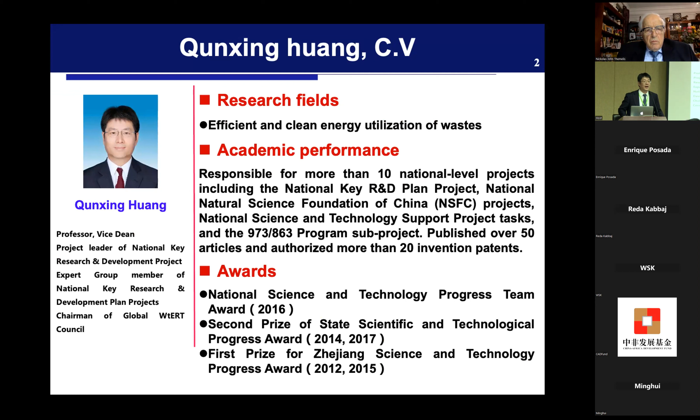And I would like to give you a very brief introduction about waste to energy research works in our university. And tomorrow, we will bring you to the big facilities we have built for waste to energy research. And here is my personal, very brief CV. I graduated from Zhejiang University, and I have been working on waste to energy for more than 20 years, and have been a PI of a lot of big national projects. And now I'm a senior expert of the national R&D research work on waste to energy.

So here is some brief information about what we are doing here in our university. The targets we are dealing with include municipal solid waste, industrial waste, and hazardous waste. We have been working on these kinds of waste for more than 30 years.

And most of our work was focused on the energy and also the environmental aspect. We are dealing with the waste from the aspect of the energy, and also we are taking care of the pollutions from the aspect of environmental protection. So we combine this together. And a lot of the research work was focused on improving the combustion efficiency, and to develop new technologies and philosophies for the treatment, like gasification, like pyrolysis.

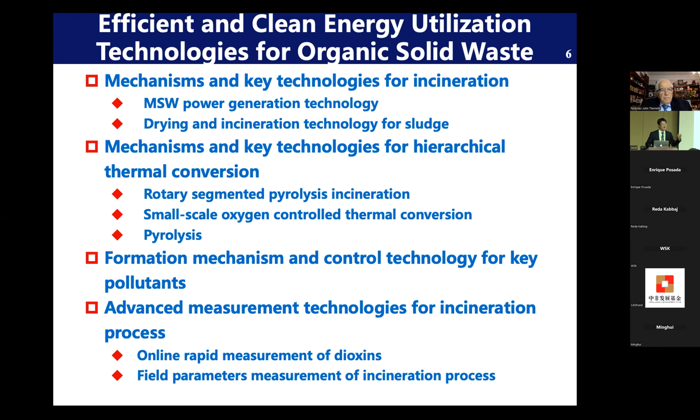And this is a technology we developed more than 25 years ago, fluidized bed incineration technology. And now it is widely applied in China, not only for municipal solid waste, but also for sludge and industrial waste, especially sludge and industrial waste. And it was awarded a national award in 2006.

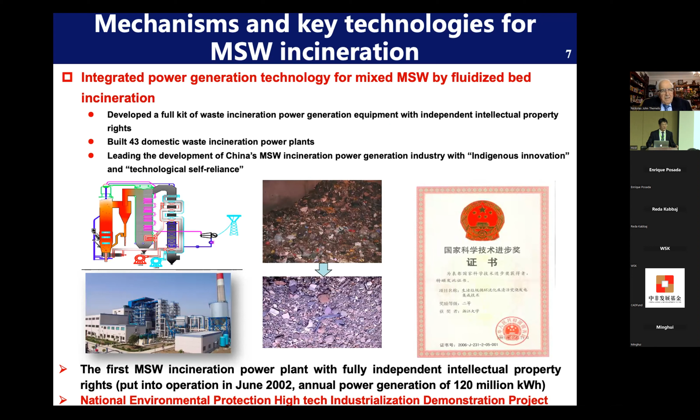And also we are dealing with new technology for sludge drying, and also to improve the efficiency of sludge incineration. And tomorrow you will see our facilities in our research center, Zhejiang.

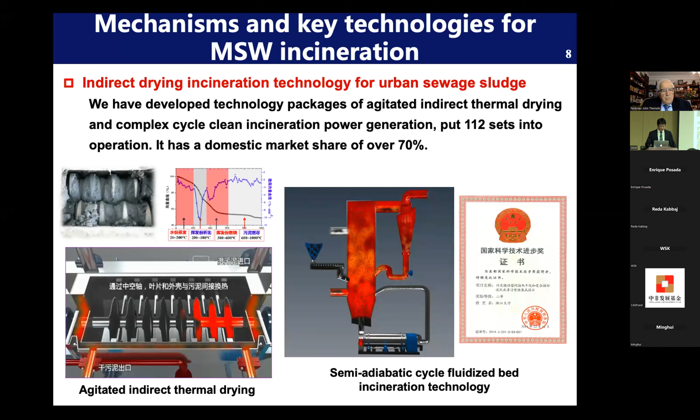And also we are working with hazardous waste, like medical waste. We have contributed a lot during the COVID-19 situation by developing new incineration technology to deal with medical waste, pharmacy waste, and the like. And this technology is also good.

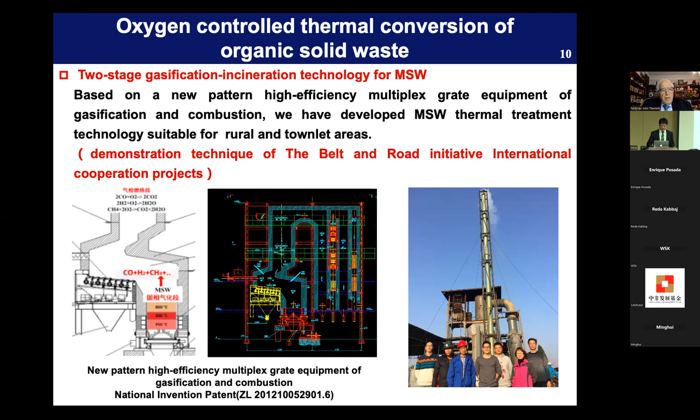And also, you know, in China, we have a lot of rural areas, people living in villages. So we developed small-scale incineration systems to take care of this waste. This is located in Jiangxi province, which was supported by a national NGO fund. And also there is a demonstration in Indonesia for waste incineration in a small place near Jakarta.

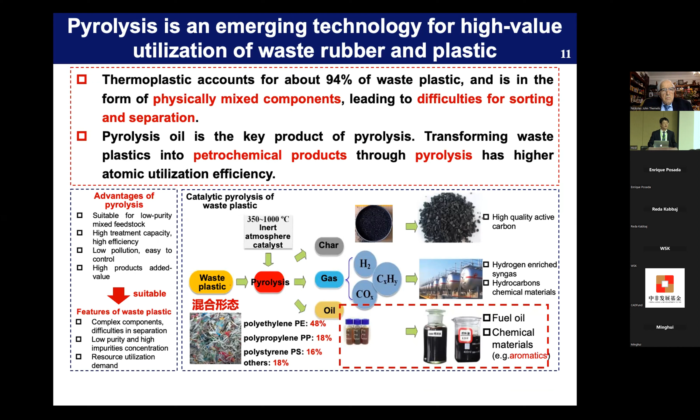And another thing we are recently doing is about industrial waste, like waste tires and waste plastics. And now we are using pyrolysis technology to take care of all this waste. We are converting them into oil, high quality oil, BTX-enriched oil, and also carbon for recirculation. And this is the pilot system.

And if some of your professors will stay here, I would like to bring you to our demonstration plant. It's very big. We are working with the largest rubber maker in China to reuse the carbon black and also to improve the recycled product quality.

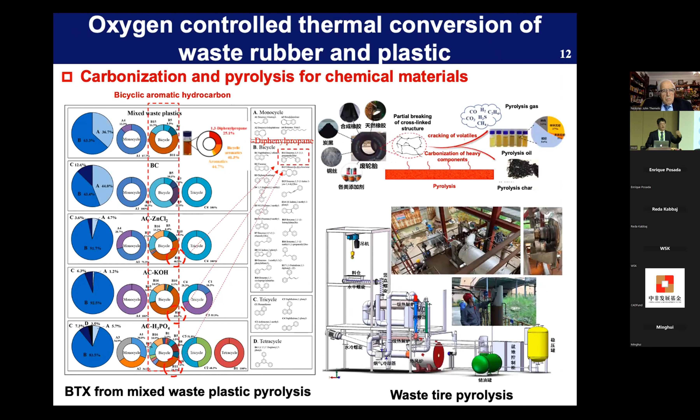And also another thing, we are working with the United States EPA on dioxin online monitoring technology, and it has now been applied in a very big plant in Hangzhou and in Ningbo. It uses laser technology to monitor dioxins continuously online. It's a very difficult technology, but the machine is already working.

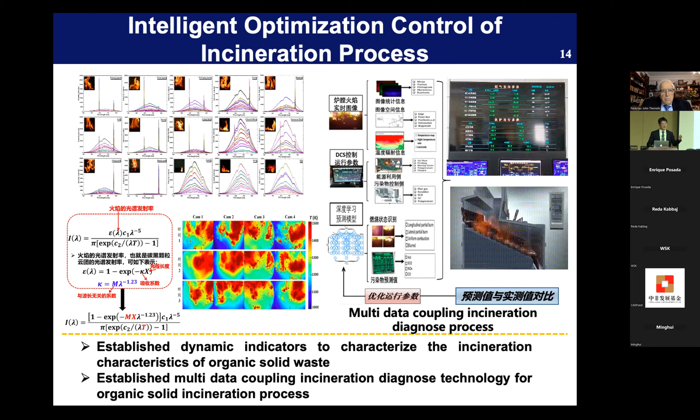And recently, under the support of our national research program, we are working on applying AI technology to improve the combustion efficiency. This is research work we have carried out in the last 2 or 5 years. We are working with Alibaba. They have an industrial cloud department. So we are using imaging technology and also neural networks to improve the combustion efficiency of various waste, like industrial waste and also municipal solid waste.

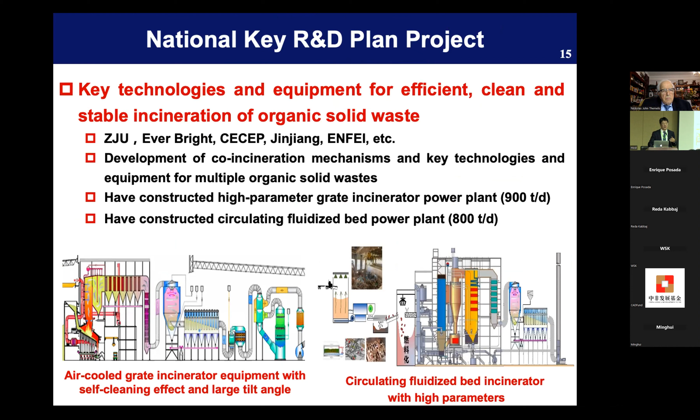And this is a key technology and equipment project which was supported by our central government, and I'm the PI of this project. The overall fund was over 20 million RMB. So we are working with Everbright and Jinjiang Group and built the largest 900 tons per day facility, and it is now in operation. And this project was highly valued by our central government.

And then this is a new technology we are developing with Jinjiang Group to further process municipal solid waste and convert it into valuable fuels like RDF. And then the RDF can be supplied to cement plants or other industries. And the quality of these fuels was very good for electricity generation and also for heating, and also very suitable for burning in a circulating fluidized bed.

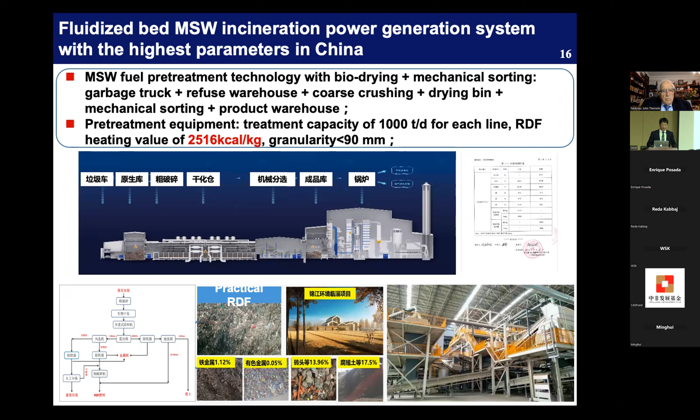Here, this is the largest CFB incinerator in China for municipal solid waste. You can take a look at the steam parameters. It's very high. This is the highest steam parameter. It's very great work for the future. This is for the future of waste to energy.

And the overall electricity generation efficiency currently can reach approximately 30%. It's very high for waste incineration systems. And the steam pressure is very high. It's close to 8 megapascals. And also, this is a demonstration project. And if you have a chance, maybe you can go visit it.

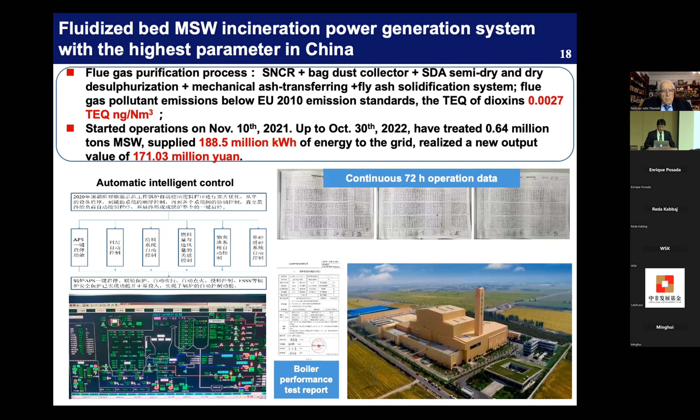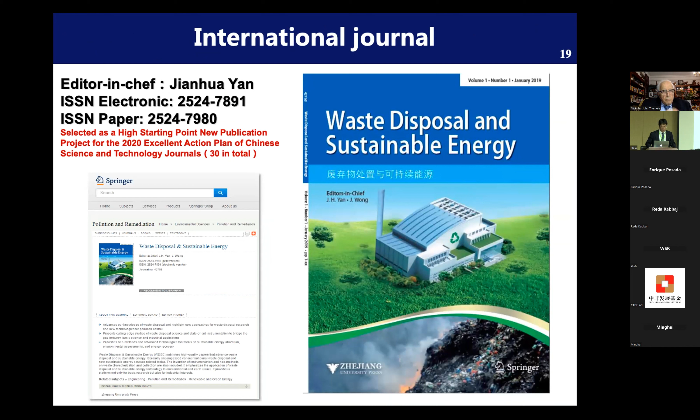Thank you. And this is a very brief introduction because we will have a chance to meet tomorrow and to see our facilities. And during that time, I would give you a more detailed introduction about our systems and about our research works. And I hope you will enjoy the Congress.

I think the most important thing for us to gather here is for the future of waste to energy. And I think it's not only to improve the efficiency, but also we have to be low carbon. Now a lot of the work is on how we can reduce the carbon and how we can increase the incineration residues value. So that's the future of waste.

Also, from this conference, I noticed a lot of professors come from developing countries, and I hope the experience of China and also from Germany or from Korea can be helpful for the waste to energy industrial business in your countries. Thank you very much, and I hope you can enjoy this Congress.

Thank you so much, Professor Yan. It's a very impressive presentation. We are very honored, and among all our members, we congratulate you on becoming the president of WtERT again.

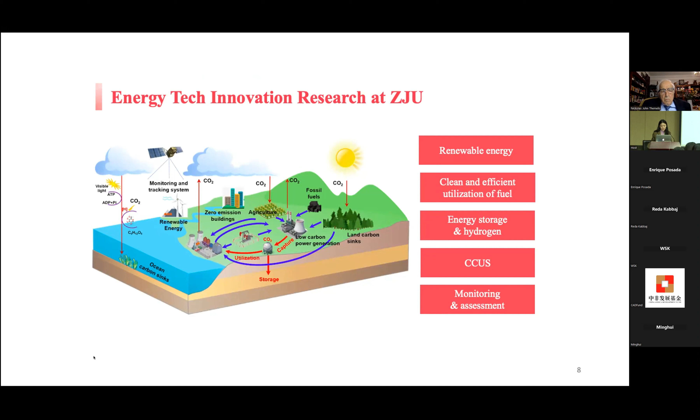Under the background of carbon peak and carbon neutrality, our energy tech innovation research at Zhejiang University can mainly be divided into 5 parts: renewable energy, clean and efficient utilization of fuels, energy storage and hydrogen, carbon capture utilization and storage, and the last one is monitoring and assessment.

We strive actively to build high-level innovation discipline platforms at CEE, and currently we have 11 national or ministerial level discipline platforms, including the State Key Laboratory of Clean Energy Utilization and the National Center for International Research on Clean Energy Utilization.

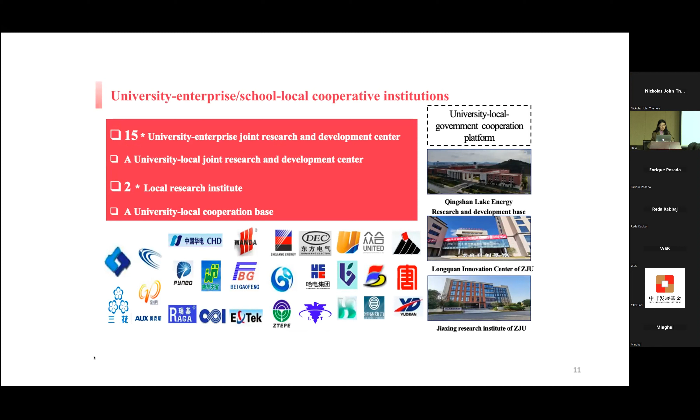We actively hold international activities. In the past 5 years, CEE has hosted 19 international academic conferences. Since the pandemic, we adopted an online and offline combined effort for holding these activities.

International education is also a key focus of our college. We put a lot of effort into funding students for international exchanges, building an international contingent of teaching faculty, and promoting international double degree programs. We also established an international joint fund at the school level.

At last, we offer international master and Ph.D. programs for international students. The master program of energy and power engineering is specially funded by the Chinese government.

We are basing this presentation on our experience, because we have been in many places in the country, in many meetings, trying to explain to people about these waste to energy systems. We have found several barriers, so I'm going to explain to you what we experienced.

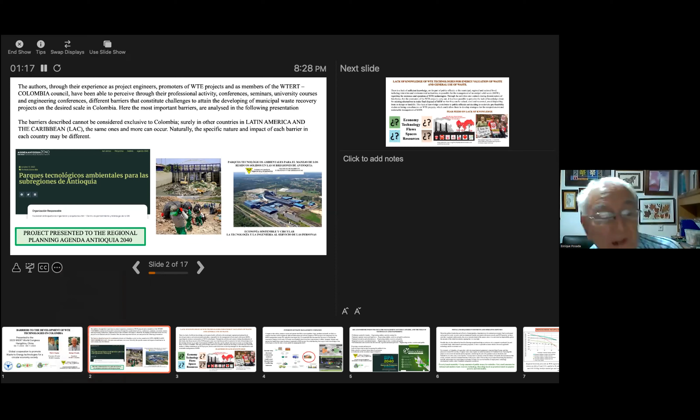Right now in our country we have the state of Antioquia, which is doing strategic planning for the coming years until 2040. So we introduced into the projects included this waste to energy initiative, which we call technological parks, environmental parks for the regions of the state of Antioquia. We are presenting this to the local authorities. The idea is to go from the normal activities they have—recycling and putting waste in landfills—to something as can be seen on the right of the slide.

The first barrier we find is the lack of knowledge of this technology in general. People really don't know what waste-to-energy technology means. Of course they have a rough idea, but they don't know the components, the need, the economy, the flows, the space required, the resources. So we have to illustrate this as much as possible. What we see is people wanting only to recycle, and people protesting any technology development that is not recycling. In our country the only idea is zero waste, recycling, and landfills. They don't have waste-to-energy technologies in their minds, so we have to explain to them continuously about this.

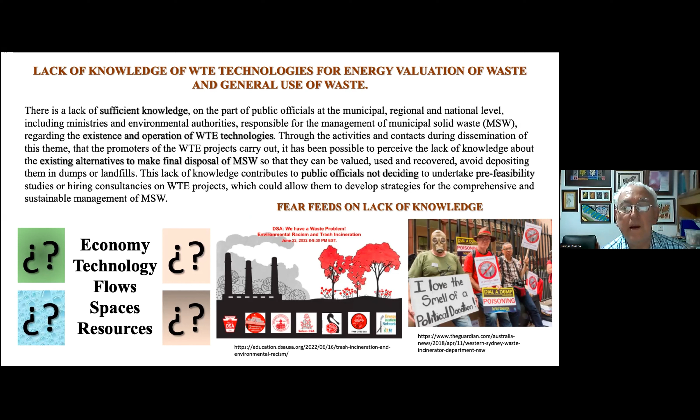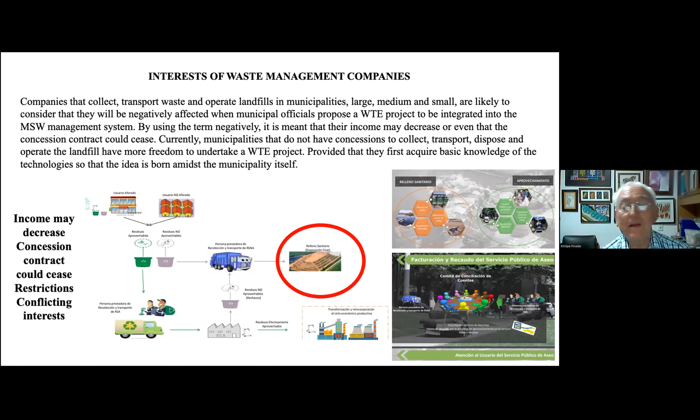Now we have to deal with the waste management companies—the companies that pick up waste from the houses, take it in trucks, and bring it to the landfill systems. They also operate the landfills, and those companies already have their business well established; they earn money by that. They don't want any technological change that involves having additional facilities, so we had to really overcome these difficulties with those people. They don't accept waste to energy because they know about the investments required—they don't have the money. They have trucks and they have landfills; that's what they have.

Next, the politicians and authorities in general work by themselves. So we had to try to establish relationships with them—with the governments in the cities, in the country, in the regions, with the people who administrate—trying to meet with them and explain all these things.

They are planning changes, but they believe they don't have the money for any change. So what they want to do is keep recycling and improving the separation and recycling systems, but they don't believe they have to go all the way to complete treatment. Although there are some instances in the country where some planning is being made. Basically, in our city and in Bogota, they are including waste-to-energy facilities in their plannings, but they don't see where they are going to get the money for that.

So the idea is that the initial investments and operations expenses are too high for this type of system, but they don't know the numbers. They haven't done the calculations. So we explained to them what the investments are and what the calculations are for the expenses, for the energy produced, and so on. But it's difficult to really explain to people about economics, because if they don't have the budgets, they don't see the need to really enter into the economic situations, and the budgets are not there.

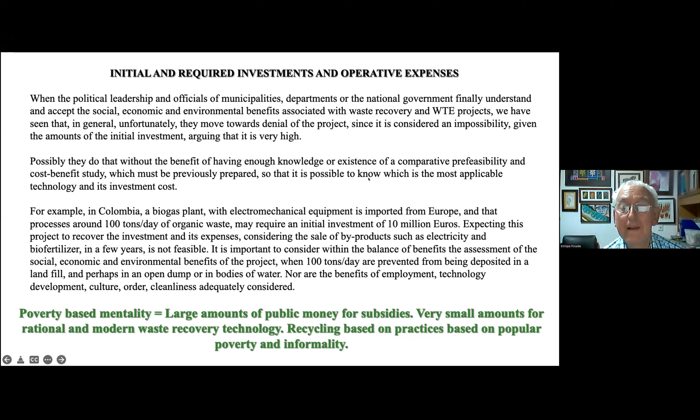Okay, so we have prepared curves in which we have done conceptual design to understand the operation expenses and investment required for this, and we put that into how much you have to sell the electricity, according to the way you proceed, to really recover the investments. We come out with numbers that are well within the possibilities, because right now electricity in our country is quite expensive. So perhaps if they really pay attention to this, they will see that by selling electricity they are going to recover most of the investment in these systems, because the electricity cost is high at this moment. The situation is better in that sense than 3 years ago, because electricity prices have risen 3 times lately in our country.

Following on, please, next. We had even calculated how many plants we need in our country according to the several options we have, and how much money we have to invest to solve the whole situation in our country. We came up with figures between $2 billion to $7 billion for the whole country. If we distribute that over 20 years, and understand that the GDP of our country is about $6,000 per inhabitant per year, then distribute the amount of money over 20 years, we come out with the idea that the amount of investment required per inhabitant is really low, not too high. So it's not too expensive really to invest in waste to energy, because we are going to solve this waste problem. We hope that by using these figures, eventually they are going to understand this.

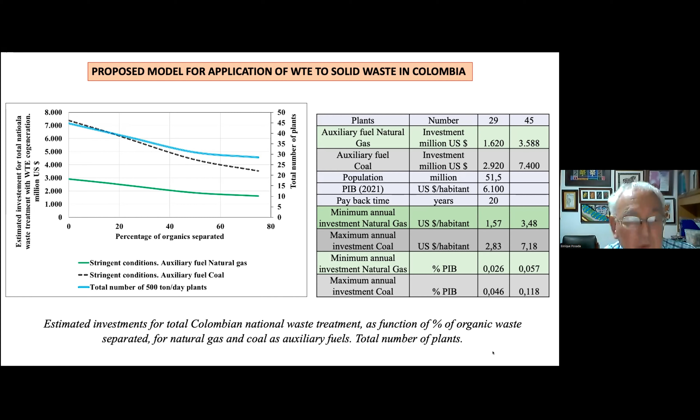Now, the legal framework is not good for us, because the Ministry of Housing is the one in charge of designing the waste systems, the waste policy. And what they do is make some kind of system based on recycling, trying to give better positions to the recyclers, trying to distribute the money among them. So they have invented a very complicated system to recycle and distribute the money coming from the recycling. But it has not really worked yet. They still keep doing that and thinking that's the way to proceed. So let's see what happens in the future. But for now the legal framework is not favorable to waste to energy.

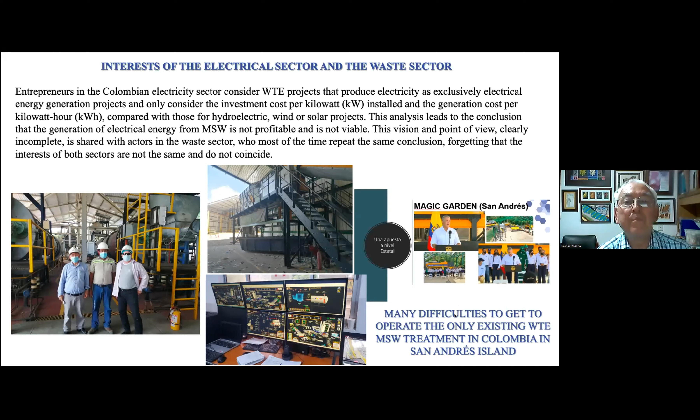But then it began to get complicated, and so far, they have decided to study the incineration ideas related to that, and until they resolve that, they are not going to do that. And this mayor is finishing her term in the city this year. So I don't believe they are going to do that. The next mayor said that they are going to build a methane burning and energy recovery in the waste site, but they are not going to do a waste-to-energy facility as was initially planned. And this is because of the difficulties of environmental licensing and getting the permits.

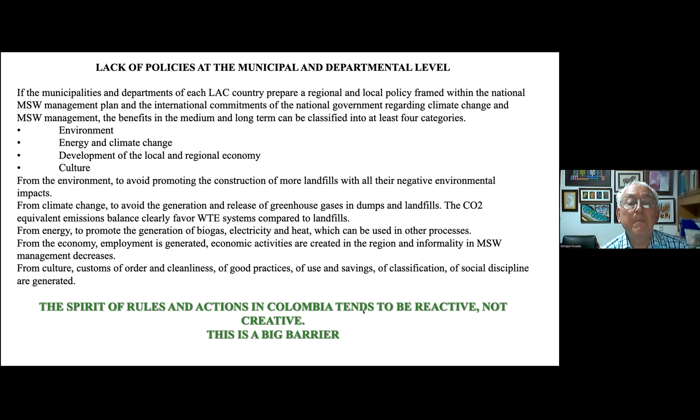Next. Are you close? Because this is the closing one. This is the closing one.

The closing one is that we have to deal with environmental groups, which is a real difficulty, because the environmental groups are every day more powerful. And so we have to discuss with them, explain to them, invite them to meetings and so on, so they really understand the advantages of all this. So basically, this is my presentation.

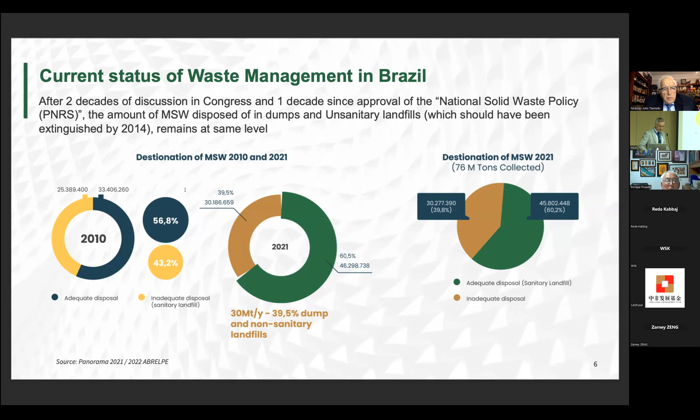Sometimes in Brazil, they create a landfill, and the operator doesn't provide a good service, and this landfill becomes a non-sanitary landfill. With this new sanitation law approved in 2020, all the municipalities have to sign concession contracts with a long-term contract. It's very important to develop waste-to-energy projects.

We are prohibiting short-term contracts, and the tariff goes to consumption bills to give a guarantee in project finance to the banks, to be the guarantee of the gate fee. You can create regional blocks of municipalities.

And the national waste management targets were approved in Brazil last year. They have the target to eliminate non-sanitary landfills and waste dumps by next year. I think that's not possible, but they are trying to do it. And for 2040, 15% waste-to-energy plants and 34% recycled material and organic composting by digestion, and to reduce landfill to 52%.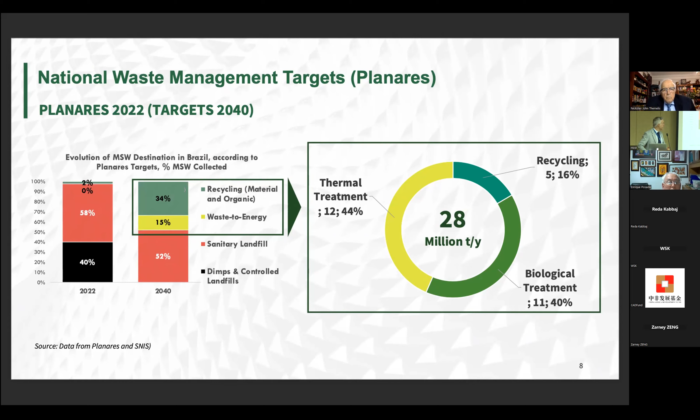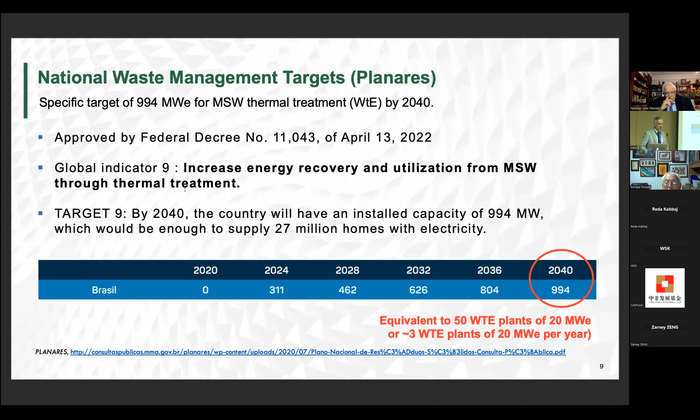This is the target for waste-to-energy plants, 1 gigawatt of capacity by 2040. We are late because next year we expect 311 megawatts, and we have nothing. We have one plant contracted, and it will be under construction in 2 years.

And this study about greenhouse gases was made by the United Kingdom government together with Brazil, the Brazil Energy Program, UK. They found this reduction of greenhouse gas emissions, the methane emissions. Brazil committed at COP26 to reduce methane emissions by 30% by 2030.

For example, we produce 82 million tons a year of municipal solid waste, and by using 21 to 31 million a year in waste-to-energy plants, we can reduce 28.9% using waste-to-energy plants. It's a good strategy, and to maintain the pledges to the United Nations.

And for each ton of waste treated in a waste-to-energy plant, 1.5 to 1.7 kilograms of CO2 equivalent can be avoided from landfills in Brazil. In Brazil, 50% of our waste is organic and food waste. And methane is considered the second biggest driver of anthropogenic climate change nowadays.

Some countries consider methane a dangerous pollutant, with 1 million people dying prematurely every year due to exposure to ground-level ozone. These super emitters, I will show you on the next slide. Brazil and other countries started committing to reduce, as I told you, and landfills are an important source of methane, a powerful greenhouse gas that, according to the IPCC, has a global warming potential 86 times greater than CO2 over a 20-year horizon.

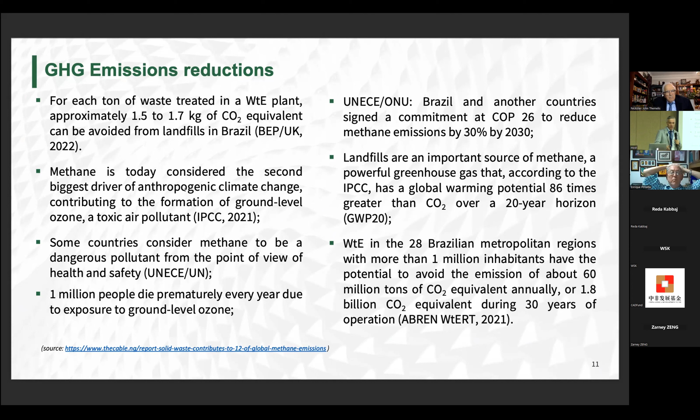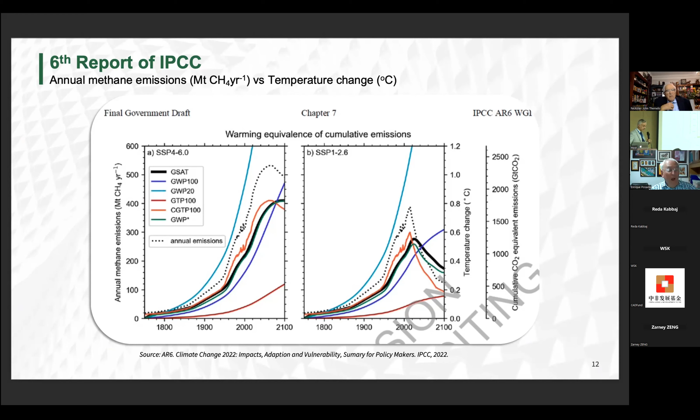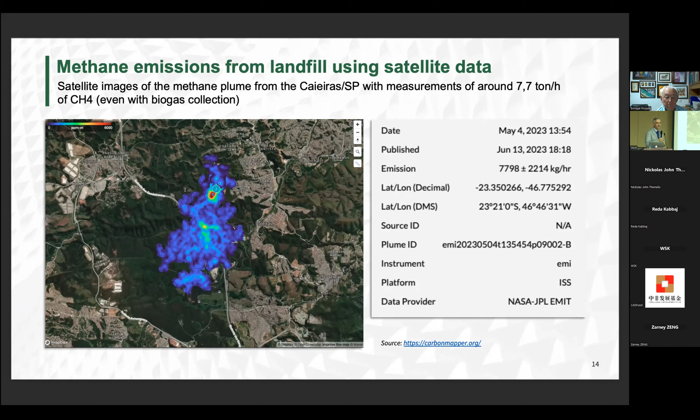Dr. Themelis alerted us 10 years ago that, in the report of IPCC, with landfills you can only capture about 50%. But the reality is worse than that, and we can prove that now with those photos.

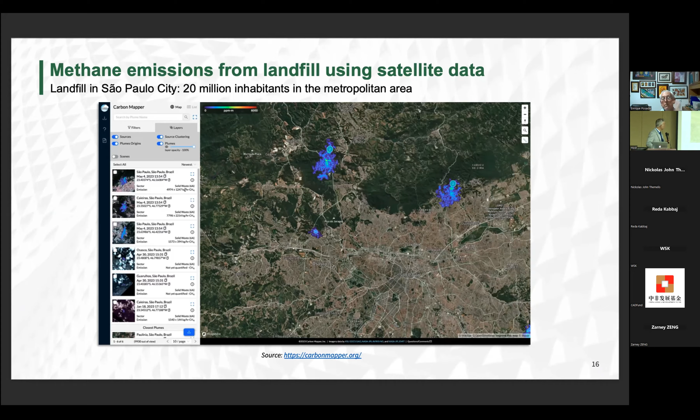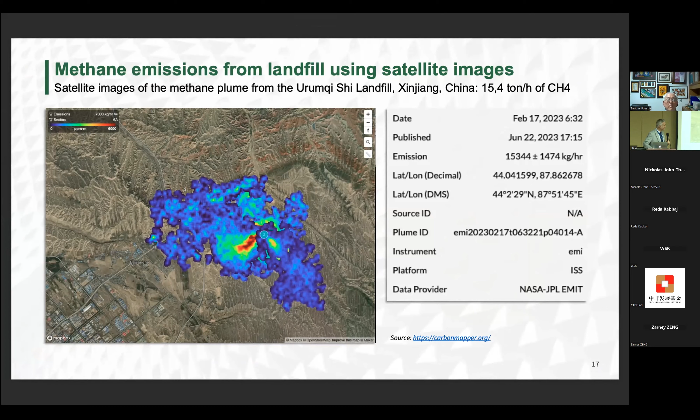And this is a study where we contracted GHGSat from Canada. They have these spectrum cameras, more advanced than NASA has. They have their own satellites. I think they have 4 satellites taking these photos for private companies and governments. China can contract them to take these photos using these special cameras, and they took 113 measurements via satellites in 22 landfills in Brazil, and this is the result of our study.

They are emitting 7 times more methane if you compare to what they are declaring to receive carbon credit, because most of those landfills are here. All those landfills capture methane to burn in the flare, but most of them, 9%, are generating electricity. And they say, this is energy recovery, very beautiful. Let's invest in them, let's reduce greenhouse gases, but it's not a reality.

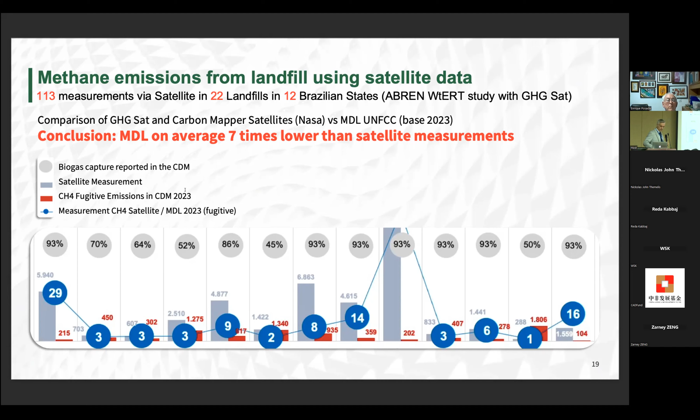And this satellite has been built by NASA, and it's very advanced. It's a state-of-the-art imaging spectrometer. We measure the greenhouse gases, methane and carbon dioxide, from space. And the new one is for carbon dioxide, and everything will change next year when the satellite goes to space, because it's possible to measure the emissions problem in real time.

Every year, you can change the inventories of emissions and greenhouse gases in the countries and find new solutions to cut these emissions. These infrared fingerprints, invisible to the eye, for example, can pinpoint and quantify strong greenhouse gas emissions and accelerate potential mitigation efforts.

And let's move forward. Some projects in Brazil that we have now, it's 256 megawatts of capacity. Mauá is a project of Grupo Lara; Daniel will talk about this project. Barueri is under construction and to be operated by 2026. Rio de Janeiro has a project, Santos, Brasília, Consimares, but we have a potential that I will show you.

A federal bank, Caixa Econômica, supported by the World Bank and IFC, BID, AFD. They have a federal fund to structure concessions and to put together landfill, recycling facilities, waste-to-energy facilities, biodigestion, composting. And we are convincing them to put waste-to-energy in a lot of those projects. They already have 80 approvals to hire consultants, and 16 municipalities have projects in progress now in Brazil.

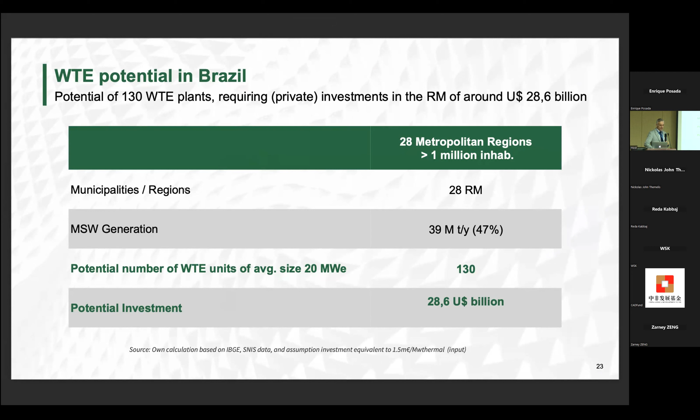And this is our potential in Brazil: we can construct 130 plants with 20 megawatts of capacity, investing $28 billion in Brazil, using those metropolitan areas that have more than 1 million inhabitants, which represent about 47% of the waste that we are generating in Brazil.

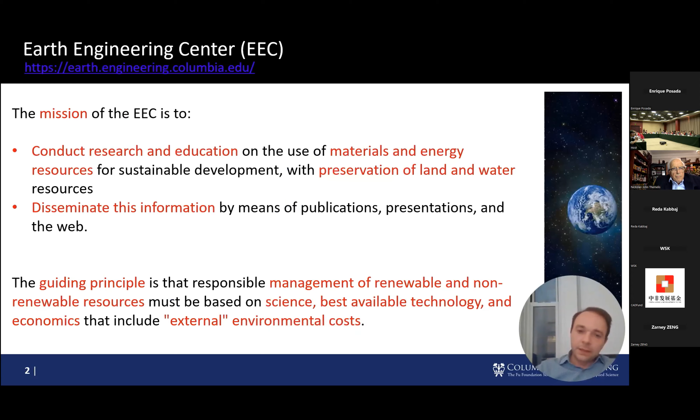The guiding principle of our center is that responsible management of renewable and non-renewable resources must be based on science, best available technology, economics, but also the external environmental costs. Several years ago, Professor Themelis developed the hierarchy, or the expanded hierarchy, of sustainable waste management by considering the different levels and the different technologies and techniques that can be used in order to properly manage our waste materials.

And at that time, and recently, we had also this 3 R's and 4 R's concept: reduce, reuse, recycle, and recover. So this expanded version implies that when we talk about all these waste materials or technologies, we can focus on 2 broad categories: materials that have a value in the market and thereafter can be recycled and provide a good economic value, and some other materials which, for technical reasons as well as for some limitations that we have in the market, cannot be recycled or recovered in terms of materials.

So for these materials, the post-recycled will have 2 options: either to recover energy, with the combustion-based systems being the dominant methods and systems in the world, or landfill all these wastes and consume land, but also emit significant methane emissions.

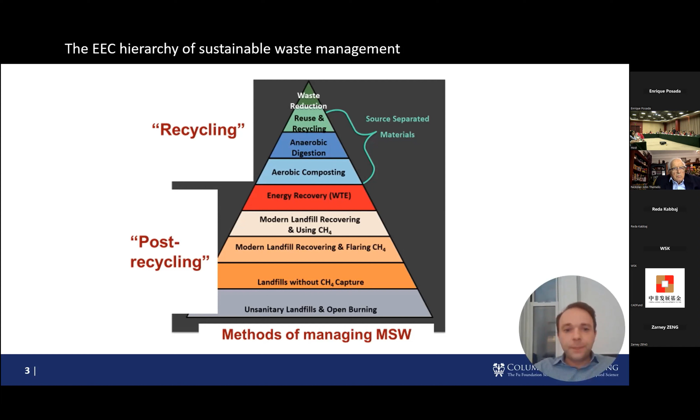That is why, in our effort to provide some scientific arguments on the limits of recycling, we visited 6 sophisticated and advanced recycling plants in Europe, and we collected primary data. We developed material flow analysis and life cycle assessment in order for us to understand the boundaries of our systems.

Of the 6 plants that I mentioned earlier, some are focusing on the recovery of materials. Some other plants are focusing on the recovery of an alternative fuel that can be used in cement manufacturing. One plant is an integrated system where they have built a recycling facility followed by a biological treatment operation and then a dedicated waste to energy plant to process the non-recyclables. And another plant, in the southern part of Spain, has a core focus on the recovery of high quality compost from the organic fraction.

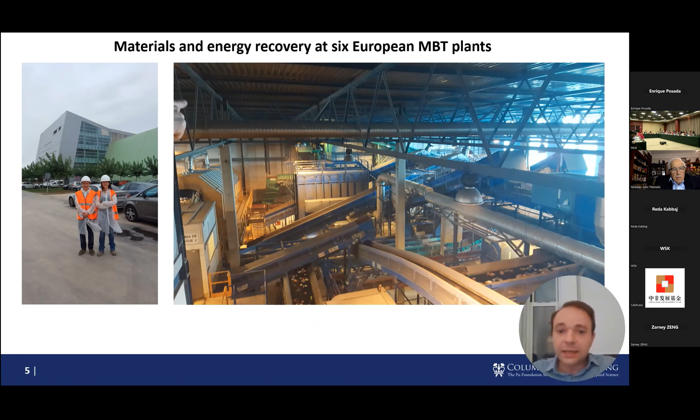On the recycling stage, all these plants operate with state-of-the-art equipment, including disc screens, but also optical separators, which have the capacity to separate specific types of polymers, of plastic materials, in real time. So when we put down all the numbers, graphed on the y-axis, we have the contribution of the specific materials in the different colors: total plastics, ferrous, non-ferrous, the 2 types of paper and cardboard, glass, organics, and non-recyclable paper and plastics, abbreviated as NRPP.

So when we put down all these numbers, system 1 sends all the non-recyclables to a landfill. The main revenues come from the total plastics, but they have a negative contribution from all the non-recyclables, but most importantly, a significant greenhouse gas effect that comes from the non-use of the non-recyclable materials.

Systems 2, 3, and 4 focus on the recovery of the alternative fuels, or the non-recyclable fraction, for cement manufacturing. So again, the main contribution comes from the total plastics, but in these specific plants they have also a contribution in terms of the revenues. A key for the economic viability of all these facilities is to secure a contract of at least 20 years with the cement manufacturers at a price of between $20 to $25 per ton.

Then we have system 5, which is the system that I mentioned earlier, the integrated approach where they have built the recycling plant, biological treatment and waste to energy plant. And this plant is by far the most profitable and has also significant savings in terms of GHG, because, as we're going to discuss slightly later, we have the highest diversion of materials from landfills.

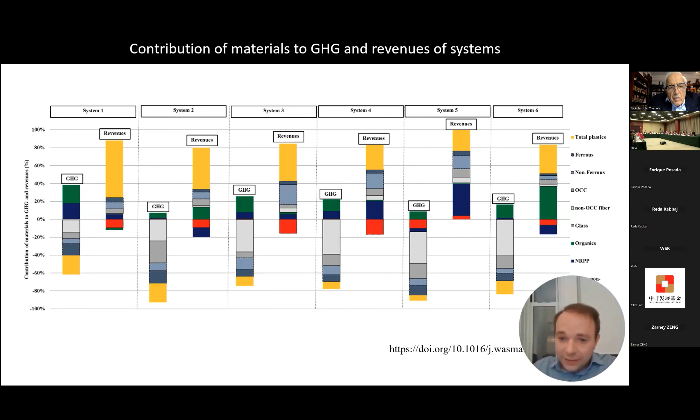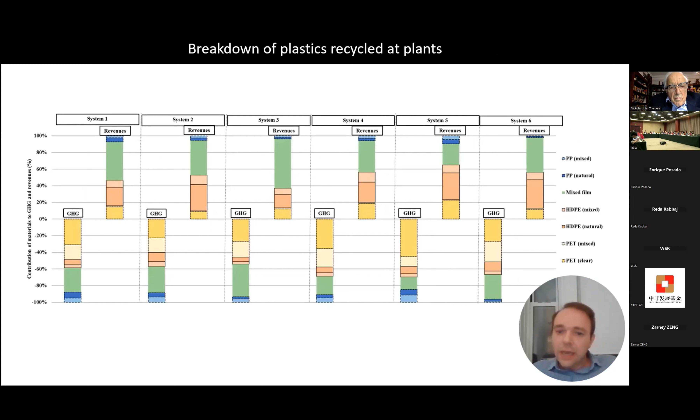So specifically for the case of plastics, when we talk about these 7 broad categories, according to our analysis, when the discussion goes to recycling, we can really talk about 3 to 4 materials, namely polypropylene, the mixed film, high-density polyethylene, and the PET materials. All the other materials, for technical reasons and some limitations that we have in the market, are not recovered.

So all in all, this was the synopsis, the abstract that has been also published by the conference of the WtERT here in the US, hosted by Professor Castaldi at City College. This abstract says that apparently system 5, this integrated approach, is by far the most profitable in terms of net revenues, but also indicates the highest landfill diversion.

Also, a recent study was published last week, where we did a thermodynamic assessment on the different approaches on waste-to-energy plants. First of all, we had electricity-only plants, the use of heat in different modes, starting from steam condensing down to the beneficial use of this heat for district heating operations, but also a novel system that we assessed on the use of exhaust heat for desalination purposes.

According to this thermodynamic analysis of the first part, with exhaust steam utilization, either for heating or for desalination, all these systems have an efficiency in terms of useful energy that can go up over 65 to 70%. Unlike the electricity-only plants, which indicate an efficiency down to about 15 to 20%. So obviously, the best practices imply that the use of exhaust heat increases efficiency and should be also considered in the design stages. Also, the use of exhaust heat for district heating purposes is also part of the Paris Agreement.

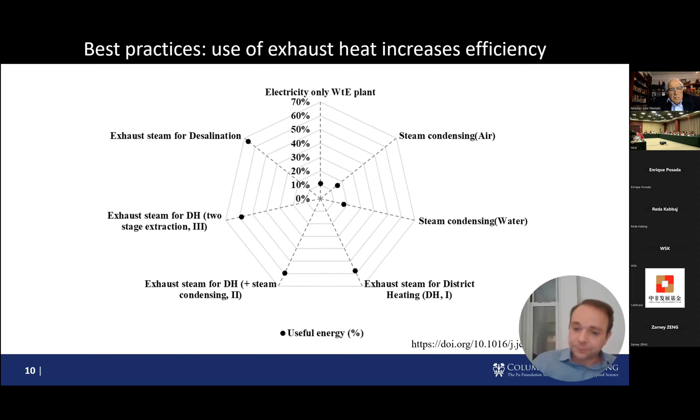And the second part of the study, where we focused on the techno-economic assessment by considering semi-quantitative criteria, namely the fresh water scarcity of cities, the limited fuel supply, the restricted land, waste quantity, waste quality, energy prices, existing infrastructure, regulatory support, public acceptance, technical expertise, as well as economic conditions.

And for us to understand where this combined waste-to-energy desalination plant can be considered, we found that the European Mediterranean region, my home country Greece, is a very good location, along with all this Mediterranean coast down to the French Riviera, as well as the Spanish region. Then also the Persian Gulf and East Asia are the top destinations, including China, Japan, and Korea. And also island nations have a fair advantage, especially on the fresh water scarcity and limited fuel supply, but also on the economies of scale.

Also, recently, we did a study on plastic waste exports, not on the global level, but specifically on the US. As you know, in 2017, China instituted a ban on the imports of plastic materials, and this obviously affected significantly the recycling markets in Europe and the US. In the US, which is shown on the left side, we had exports of about 2 million tons, even more in several years, of plastic materials, different types of materials, mainly to China as well as Hong Kong.

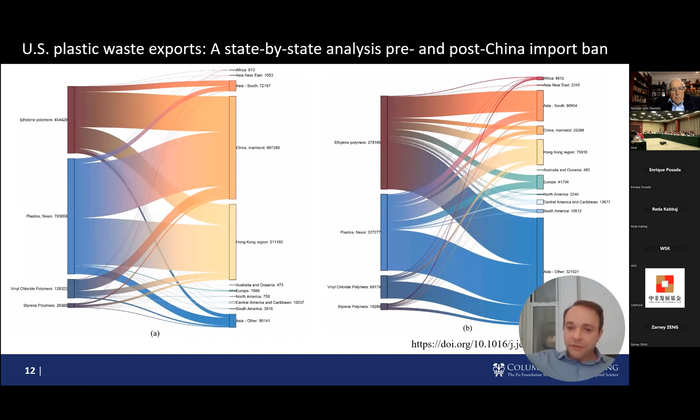After the Chinese ban, all these materials were redirected to other Asian countries, as well as South Asian countries, so mainly Indonesia, Malaysia, Philippines, as well as India. We also had cases like California, which was the top in terms of exports in both periods, pre and post, which also relates to the very big population, followed by Illinois, Texas, as well as New York. So all these places, instead of building their own infrastructure, prefer to redirect the flows to even poorer countries, which obviously don't have the capacity to process and treat properly all these plastic materials.

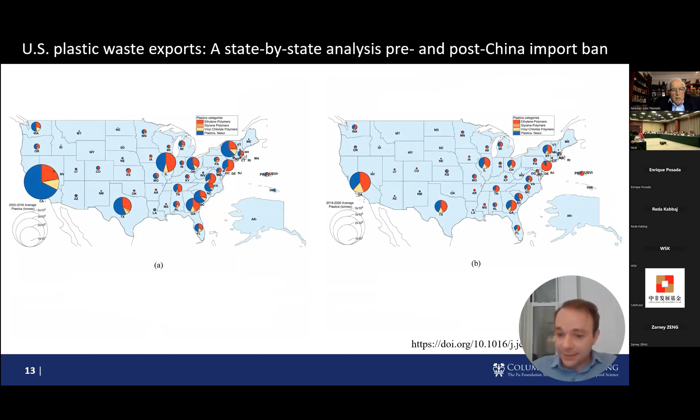And when we also did a life cycle assessment along with a techno-economic part, which is shown in this last bar towards the end of the graph, obviously a domestic treatment of our materials implies that we will have to increase significantly the recycling rates from a low 9% of plastics recycling, which is now in the US, up to about 70%, and the rest should be processed in waste-to-energy plants, an expensive system, but obviously associated with significant benefits. But also a partial increase in the recycling rates and an increase in the waste-to-energy rates will be associated with benefits as per scenario A.

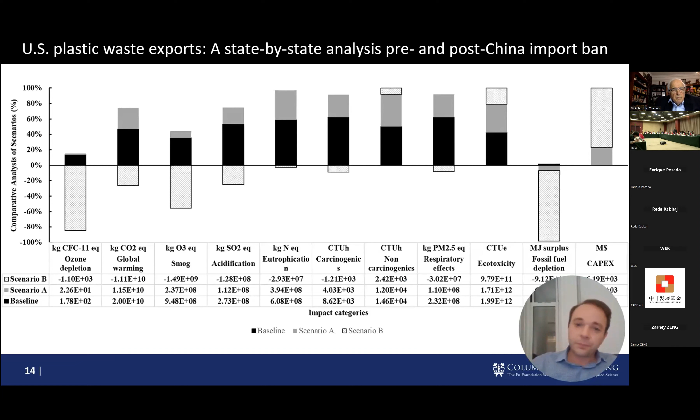Since 2015, right after the Paris Agreement, we have had a very strong collaboration with the United Nations and the Center of Excellence for Public and Private Partnerships. Recently, last week, we extended this collaboration for the next 3 years.

We developed guidelines for public and private partnerships specifically for waste-to-energy projects, on considerations that should be taken into account at the very beginning of the projects to make sure they comply with the Sustainable Development Goals, the 17 SDGs, but also with circular economy principles, under this umbrella of public and private partnerships, which is associated with significant reductions in investment risk.

So the top priority is that waste-to-energy facilities should only process non-recyclable waste. State-of-the-art technologies must be embedded in WtE plants to ensure compliance with stringent pollution standards. Adopting the 5 desirable outcomes of public and private partnerships for the SDGs, which I'm going to explain next, could help governments and industry adopt better legal and policy frameworks to ensure best governance practices in waste-to-energy projects.

This table is a summary of these 5 outcomes. The very first priority is access and equity. Ideally, these projects must provide service to low-income communities and vulnerable groups, improve equity as well as social justice, and plan for long-term access and equity.

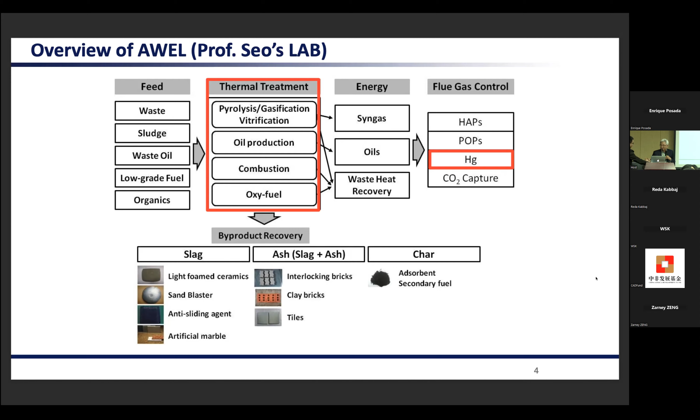My lab used to develop thermal treatment processes for very poor fuel or waste to produce different types of energy. While we utilized this process, we had to consider air pollution control, so I did research on air pollution control. At the same time, we had to recycle some of the residue from those processes. That's why I did a lot of research on waste management, especially thermal process development for the country.

At the same time, I worked with WtERT from 2010. Also, at one time, maybe 7 years ago, I was in charge of WtERT Asia as vice president. It originated from China.

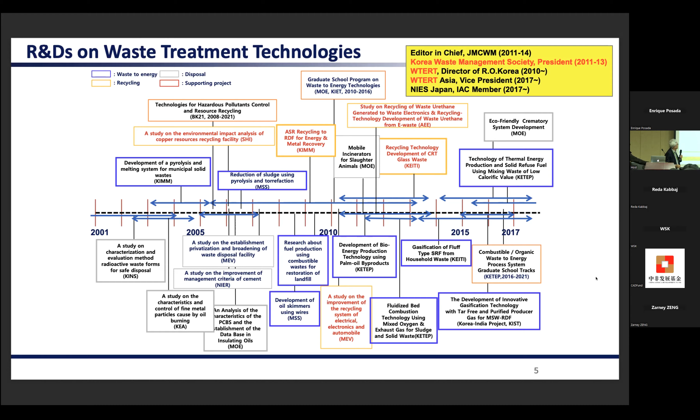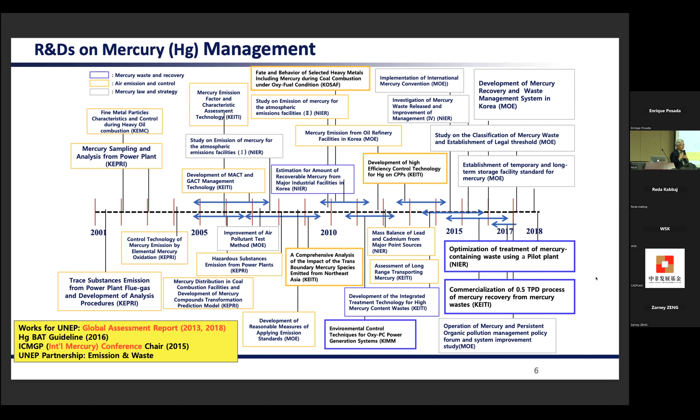Why I worked on the waste management field about 20 years ago: when I was at US EPA, they asked me to research mercury, because it's one of the hazardous emitted pollutants. So I started my research on mercury to lead my whole country. We didn't have such research at the time, 20 years ago. So I proposed policy papers to develop strategies on how to manage mercury from emission up to mercury waste. That's one of my fields of research. I also worked for UNEP writing the global assessment report on mercury management. So I have two fields: waste-to-energy and mercury.

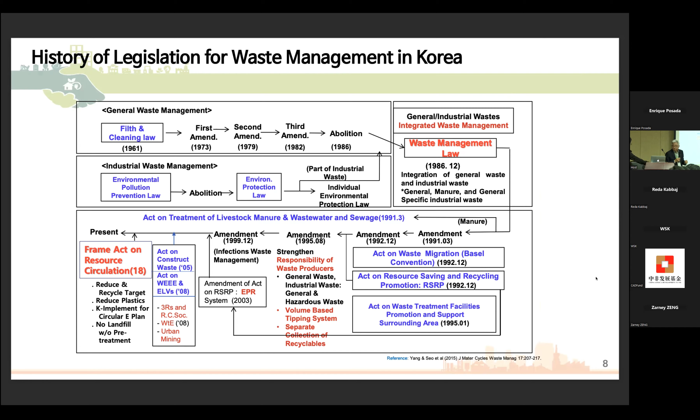So I'll show a couple of policies which succeeded. One is the polluter payment concept - the producer must pay. We call it the volume-rate garbage charging system. Every household must buy a bag which is priced, from the supermarket, otherwise you cannot throw out waste. Before putting waste into that priced bag, you have to segregate recyclables like metals or plastics, even food waste. For food waste, you have to buy a designated priced bag, or have a weighing machine in each house.

The same concept applies for other municipal solid waste. So with this system we can well segregate recyclable, combustible, and food waste, and at the same time reduce that waste. This was applied in 1995. Before, we had to pay a fixed tipping fee, maybe $3-4 a month per household. But after changing to the volume-based tipping system, my wife spent only $1 or $2. So what does that mean? The waste has been reduced.

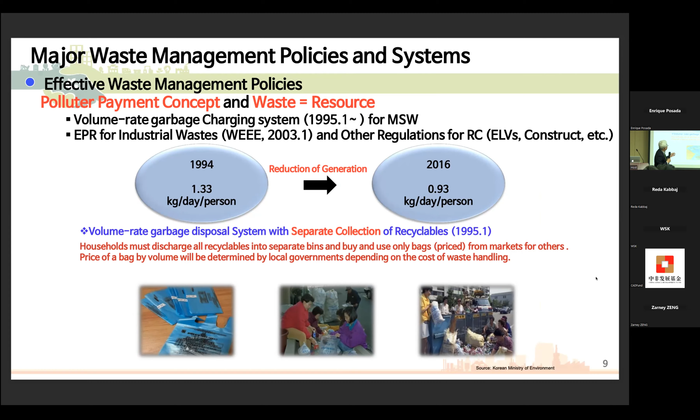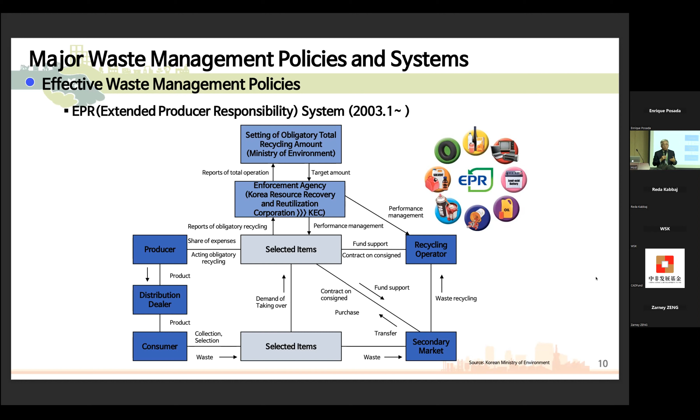Next, for industrial waste we have the so-called extended producer's responsibility. Every item, such as TVs, tires, batteries, and those kinds, falls under this system. The manufacturer, provider, or seller must pay in advance to the government, which distributes that money to recyclers. At the end of the year they count how much percentage was recycled - they got promised funds and paid them to a governmental subsidiary company, and this reduced the generation of industrial waste while properly enabling recycling. Now we have more than 200 items under that EPR system.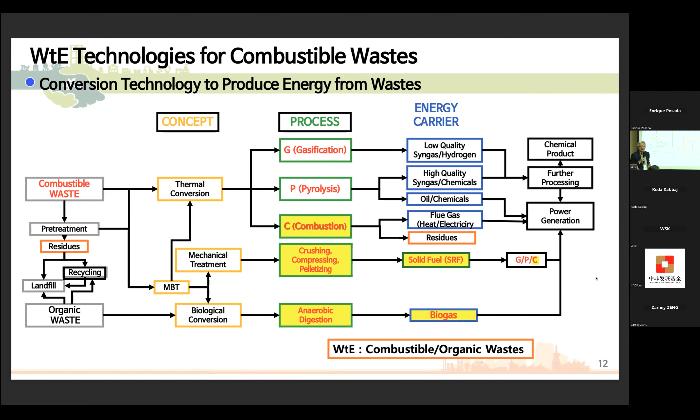Okay, this is briefly showing how many incinerators we constructed from maybe around the 1990s to 2005 or so. Just a few incinerators, of course, were constructed after 2005. So finally, we got around 20,000 tons per day of

waste burning. But most of them are just stoker type incinerators, and just a few fluidized bed. And also we utilize gasification melting facilities, maybe eight or nine facilities. So in total around 20,000 tons of waste are burning. Next one.

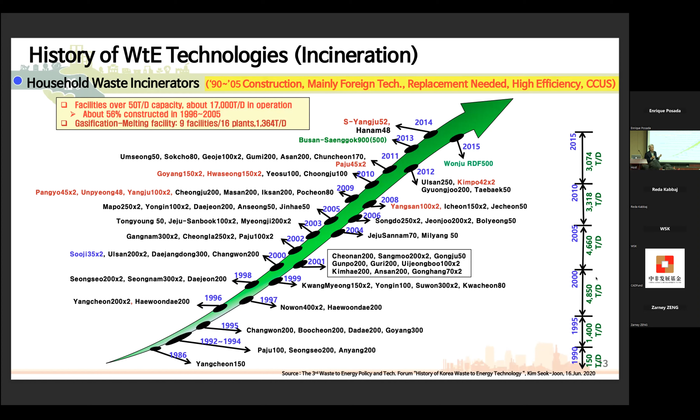And this is about the history of SRF. As I told you already, in 2008 the government pushed to utilize more RDF. So many manufacturing facilities were built, and also power plants using SRF. Next one.

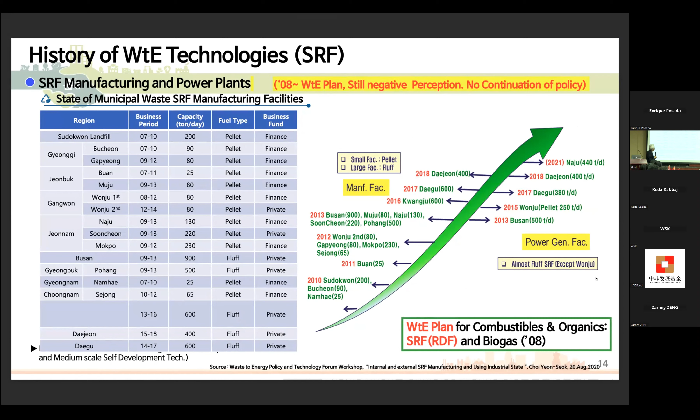This is gasification. We did a lot of R&D, but it was not well commercialized. You know why? It was not economically feasible. Also, a lot of technical effort must be put in. But I did one of the research projects for a bit bigger unit, 8 tons per day, as an R&D step, and it was good. We can utilize a gas engine to generate power from 8 tons per day, actually SRF, because it's pre-treated. If you pre-treat the waste, it's much better for getting gas by gasification.

Actually, the original schedule was to build an 80 tons per day unit, a real commercial unit in one city. But this was governmental funding, so they were a little bit worried: if you put in a bigger one and it failed, a lot of trouble. So we just finished up to an 8 tons per day gasifier unit. Okay, next one.

And there's pyrolysis. Of course, we did a lot of research on pyrolysis, especially for plastic. From 2018 or 2020 up to now, the political parties have been very much stressing plastic to oil by pyrolysis. So it's going to be a good market, I guess. Already 20 companies are in competition to develop it. But the scale is around 10 or 20 tons per day units, not big ones. There's a limit to making a bigger size.

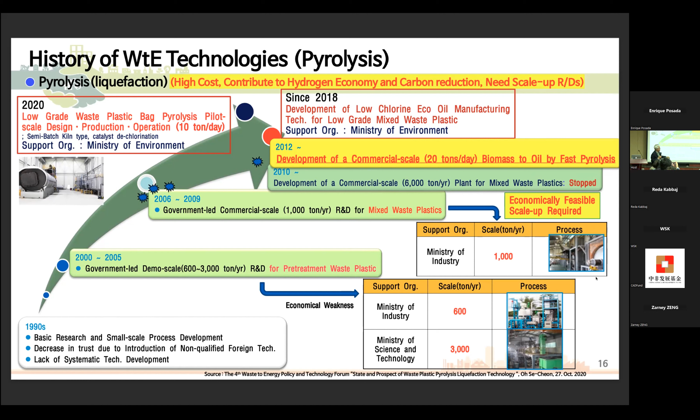And I did one project recently, developing a commercial scale biomass to oil project. I built a 20 tons per day unit. It's a fluidized bed, with a good cleaning system for tar and such things. But anyway, biomass is much easier than waste. Actually it uses a byproduct, not real biomass. That is in operation now, and I must say it's one of the biggest, at 20 tons per day, even including the plastic pyrolysis. Okay.

Okay, this is a brief history of waste management. Actually, the previous speaker and I wrote one of the papers on this trend. In 1982, just before the waste management law I mentioned, landfill was 96%, so totally landfill. But that landfill was not sanitary, just open dumping. After the law, the government pushed to install many incinerators and at the same time sanitary landfills. All landfills changed to sanitary, not open dumping. And, I didn't write it here, but many sewage water treatment systems as well.

In my opinion, one of the reasons we could do it at this time is our economy was growing very fast, so the government could put a lot of money into public waste and water treatment systems. That's why I said this was the first movement of waste to energy technologies in this period. And the second one, I said, was the utilization of SRF in 2008. Now, for household waste: 13% landfill, 25% incineration, around 62% recycling.

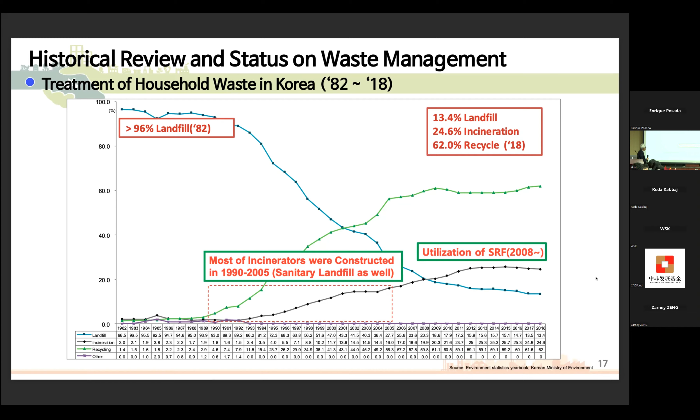Just from my curiosity, I tried to calculate how much greenhouse gas has been reduced through the history of those activities. I drew it here. In 1982, because landfill was the major measure, about 25,000 metric tons of greenhouse gas were emitted. But right now, it's maybe around negative 50,000 of CO2 generation from waste management activities, utilizing different options.

A commercial 600 megawatt coal power plant will generate 10,000 metric tons every day. So maybe the greenhouse gases of seven or eight power plants got reduced through the history of waste management. Okay, next.

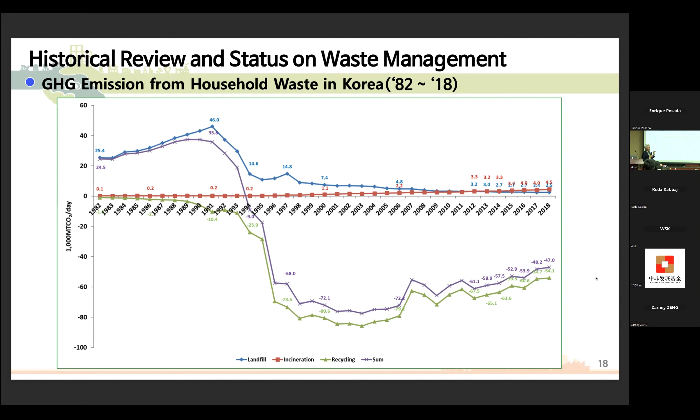Okay, you know this figure well, so we can achieve the circular economy and, at the same time, carbon neutrality. We follow the principles of waste management: reduce first, recycle, energy recovery, and then next. I took this figure from the Ellen MacArthur Foundation. She drew this kind of curve. So we have to go to a circular economy. I move to the next slide.

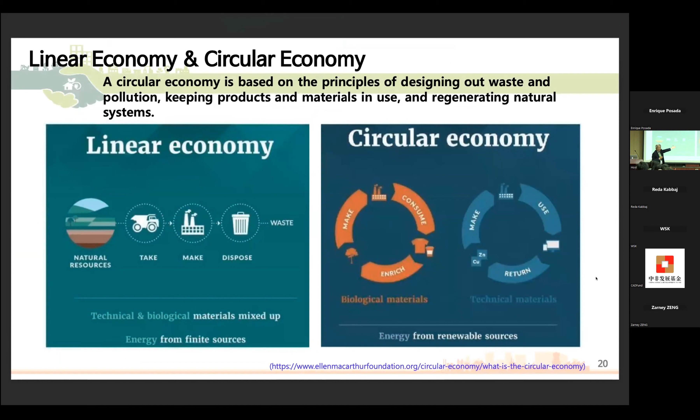Also, in the country nowadays, this is the issue: how can we achieve the circular economy? Governments nowadays are stressing recycling again, even though we got 60% recycling or more, because this is a good word, good to the public. The public will like it this way, right? You can even get more votes from stressing it. But what I'm going to say is they are not clear in recognizing the role of waste to energy, even though we have been doing well in waste management.

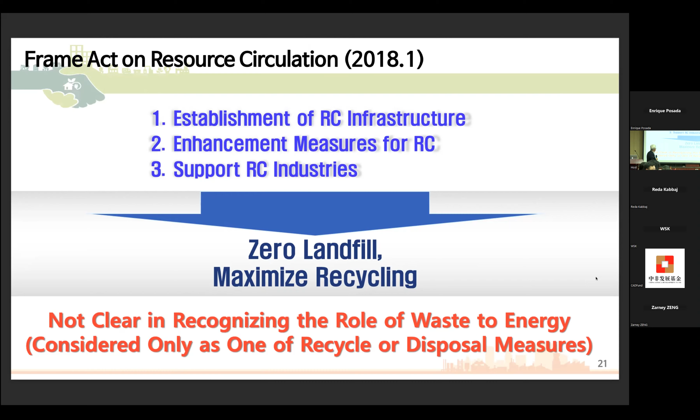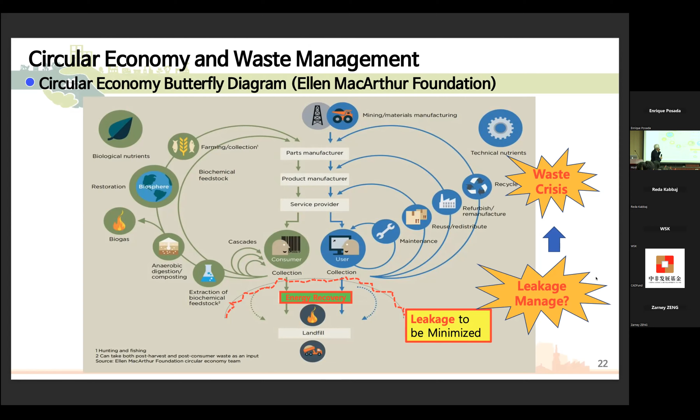That's why we faced so many waste problems recently, even though they are putting in new laws, the circular economy law or something like that. So what I'm saying is, we have to go further to develop more waste to energy facilities to get to around zero landfill, maybe zero waste. Okay, next one.

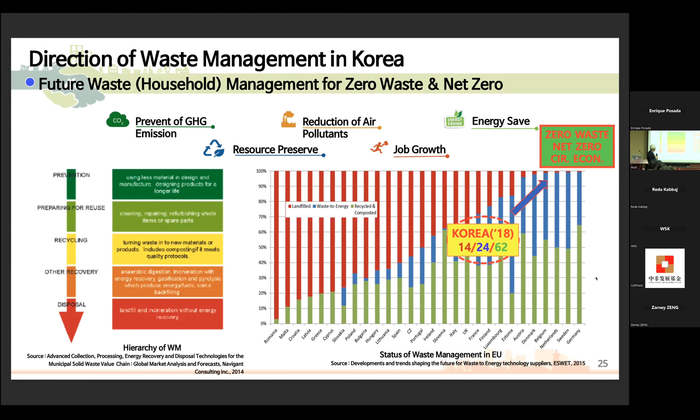I quote this from the EU. As you may know, we are here now, 14/24/62: 14 landfill, incineration 24, and recycling 62%. Advanced countries in Europe have almost zero landfill and recycling around 60%, which means waste to energy is another 30% or so. That could be one of the indices of where we have to go. I say we have to go that way to achieve the circular economy and net zero waste. Here's a summary of why we utilize waste to energy further, even though we did well up to now. The next one.

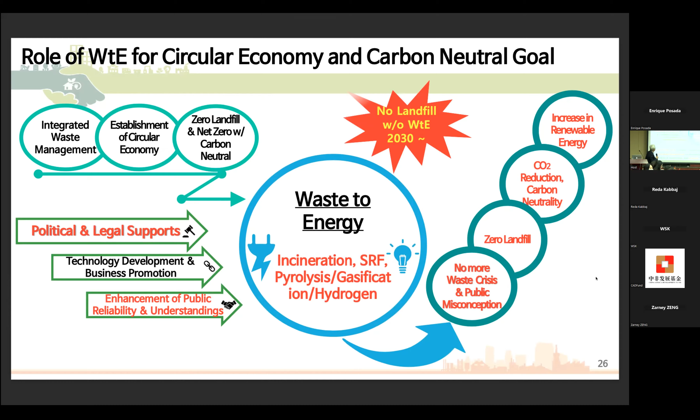This is a summary of my talk. We did well with utilizing waste to energy, but in the last 10 or 15 years in Korea, the government and sectors do not realize the real role of waste to energy. Also, as you know, a lot of incinerators were built in the 1990s and 2000s, so they are coming up on 30 years now. It's time to replace them. Aged incinerators have to be replaced with proper technologies.

And the government put in this kind of goal: all waste must be pre-treated before landfill. What does this mean? It has to be burned. But they are not supporting it. They just put one line in the law and regulations. So what does that mean? In Korea, waste to energy industries will be coming up.

Okay, so like Seoul metropolitan city, they are burning around 2,000 tons of waste every day, but another 1,000 tons of waste must be burned. So recently, I was working for them to designate one new site, but there were a lot of objections there, even though they had experience; they knew the incinerators in their residential area, the big apartment next to an incinerator, but still objections.

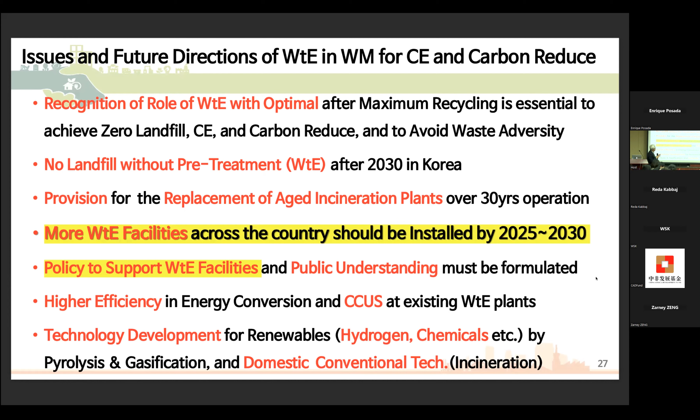So nowadays, after making oil, that oil can be upgraded to transportation oil or aviation oil. So we are doing research on that. Yeah, technically it's possible, but for commercialization they're still working on it. Okay, I think I'll skip the next slide.